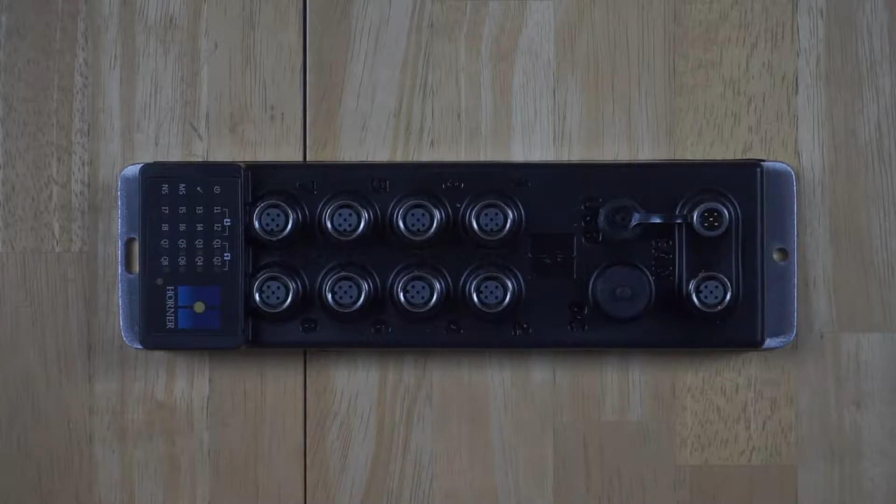So let's go ahead and take a look here. All right, so this is the new product I want to go ahead and demo for you today. What is it, you ask?

Well, it is a new Horner IP67 I/O block. How about that, huh? Really nice. Now this is something that we've never talked about before with our customers. We've had a few partners that we've mentioned it to, but this is really a brand new product. It's not ready to sell yet, but it's getting pretty darn close. And again, I'm going to preview it for you here for the first time anywhere.

So let's kind of walk through the product a little bit here. All right, so let's start up here. So as many of you may already know, a lot of our remote I/O products are based around CsCAN, which is our proprietary CAN network. And this product is no different. So what we have here is we have a CAN in and a CAN out port. So that's where we make the network connections.

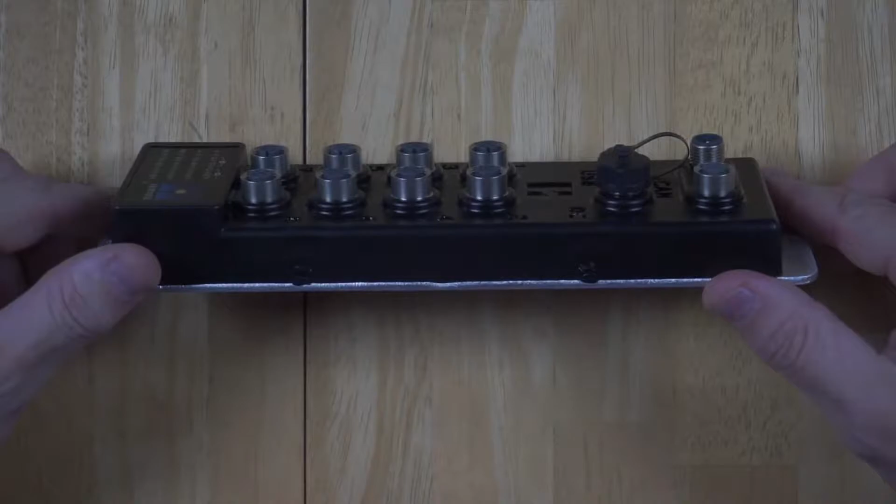Now, for those of you who aren't necessarily familiar with what IP67 I/O is, basically it's I/O that you can put out right into the environment of the factory. You don't have to put it inside of a panel because of the fact that it's molded and it can be directly washed down. It uses sealed connectors, and you can put it right out in the environment, not inside of a control panel.

And our products have been used in these applications for years, but with third-party I/O. And now we've got an I/O block ourselves that can be used. That'll be very cool. All right, so let's walk through it. I started to mention the fact that we have a CAN in and a CAN out port. So you can just use standard cabling and daisy chain them in and out. Okay, very cool. Also, power comes in from here as well. So just like Smart Block or Smart Rail or our other I/O options, they get power from the CAN connector, and that's true also with this I/O block as well.

All right, so here we have CAN in and CAN out. Now, if this guy is on the end of the network, you'll have a CAN in or a CAN out, but not both. And then there's a standard plug with a resistor embedded in it. That is a standard molded product that can be purchased to give you network termination, again, using the same connectors. So that's also very cool.

Okay, now I'm going to skip these two connectors for now, and I'm going to proceed to the next 8 here. So what we have here are 4 input connectors and 4 output connectors. And we've got 2 digital inputs on each of these connectors and 2 digital outputs on each of these. Well, using a standard cable, how are you going to access, let's say, 2 sensors on a single port if you've got the 2 inputs here? Well, just like a lot of companies that sell IP67 I/O, we've got these splitters that will be used to provide a connection for 2 sensors, for instance, with a single port.

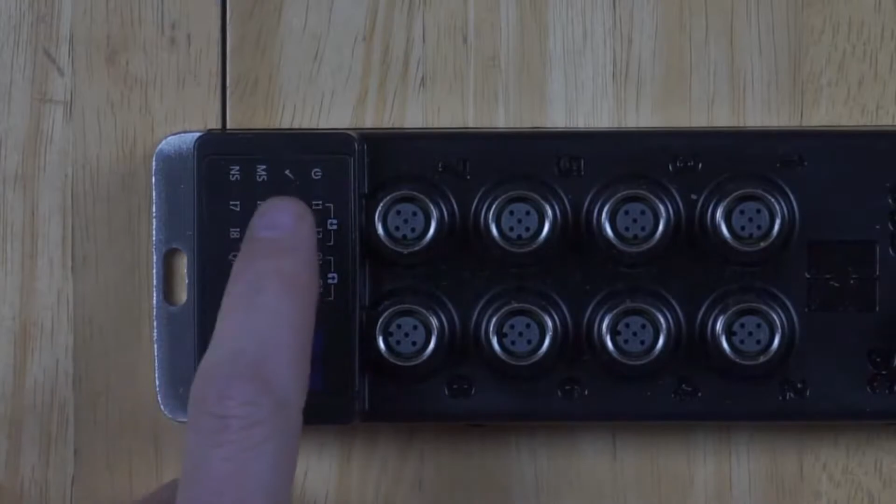Okay, now let's go ahead and take a look down here. Let me zoom in a little bit here. All right, center this back up. At the bottom here, we've got LED indication for the 8 inputs and the 8 outputs. Now, this is all sealed, okay, so it's wash down rated, no problems there. In addition to those LEDs, we've also got network status, power, and OK lights like we have on all of our remote I/O products. So that's very cool there as well. And I'll come back to this area of the product here in a little bit.

All right, now, and I'll go ahead and zoom back up here, but believe it or not, there's actually more here. I haven't covered all the features and functions yet. On these 2 input ports, not only can we support standard digital inputs, but we can also support high-speed counting. Very cool, okay? So that means that if you have encoders, or if you've got some sensors that are going to be responding in a very high-speed way, and you want to do totalizing on those sensors, photoeyes or something, you can do that. So these are compatible with encoders and high-speed counting in general. So not only do we have 8 digital in and 8 digital out, we've got high-speed counting. Pretty cool.

Okay, still, we've got more here. Now, in addition to the digital inputs and digital outputs and the high-speed counter capability, we've actually added analog signals to some of the spare pins as well. So with the appropriate cabling, you've got analog inputs and analog outputs, 4 to 20 milliamps, available on the I/O block. So not only can you do digital I/O and high-speed counting, you can do analog in and analog out, 4 to 20 milliamp, which is by far the most popular analog signal type. Okay? Awesome.

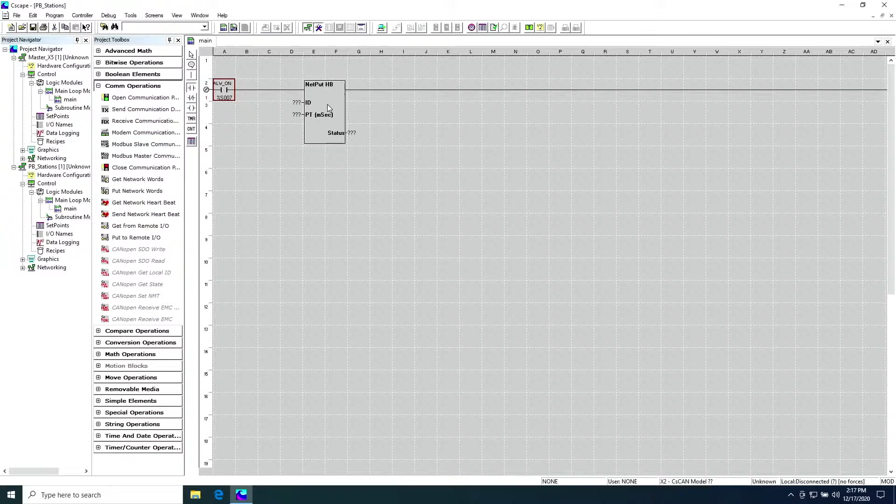So I'm just going to use an always on normally open contact here. Okay, what network ID would I use? Well, I just want to use whatever network ID has been assigned to this unit. And that information is available in system register 29. So regardless of how it's set ID-wise, if I use system register 29 as the network ID for this function block, it's going to show up properly, okay?

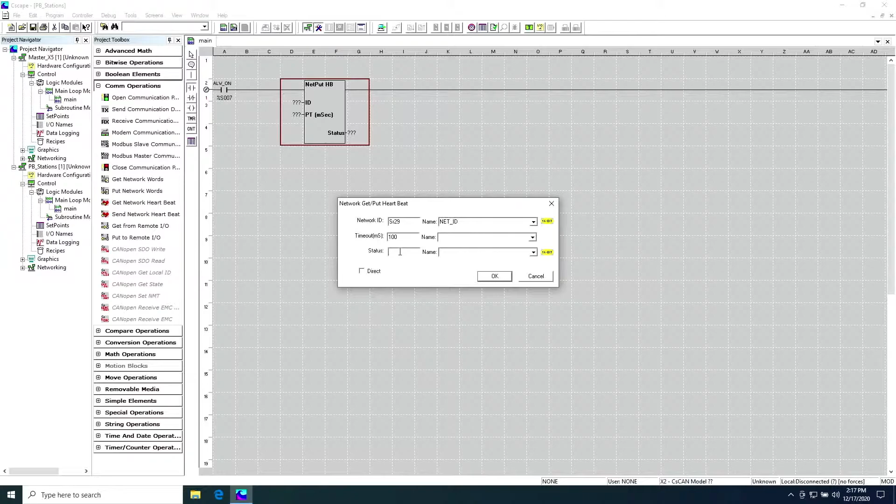And then I'm going to set a timeout. So let's say I'm going to send a heartbeat every 100 milliseconds, and then there's a status register here that we can assign. I'm not going to talk about that much right now. Okay, so now we're sending out a heartbeat every 100 milliseconds, and the main OCS on the other end can look for that and make sure that it's there to verify the health of this particular unit that I'm programming.

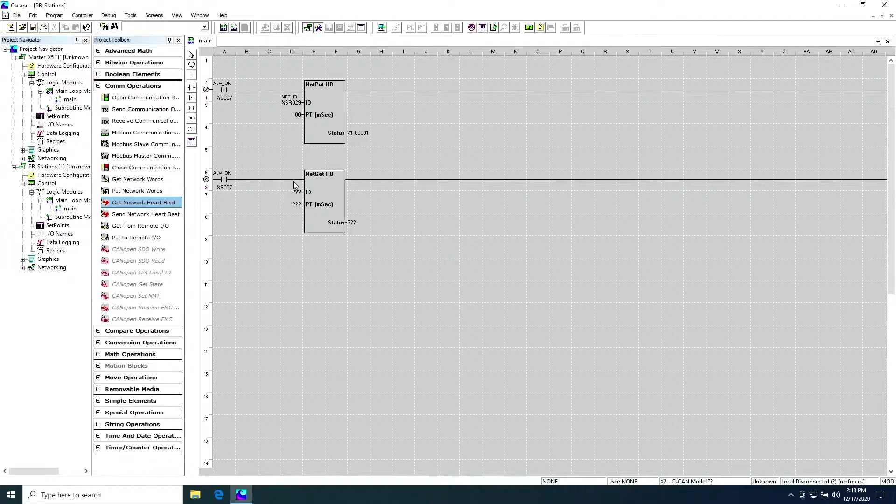Now I'll go ahead and make that another always on contact here. And now I'm going to add in the get network heartbeat, because not only does the main OCS need to know that this device here is healthy, we also need to know that that OCS is healthy so that we can react appropriately and maybe turn the outputs off, for instance. So this time under network ID, I'm not using my own network ID. I'm going to use whatever the OCS's network ID is.

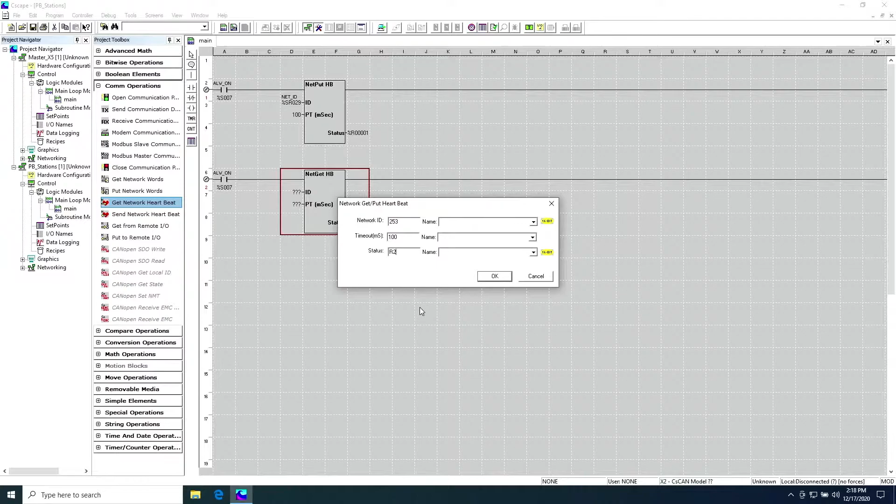Okay, so I'm just going to fix it at 253. We'll assume that's what it is. It could be something different, but I'll just make it 253. And then we're also going to configure how often we're expecting a heartbeat from this device. And similarly, we're going to assign a specific status register to that. All right, so now I'm exchanging heartbeats with the main OCS.

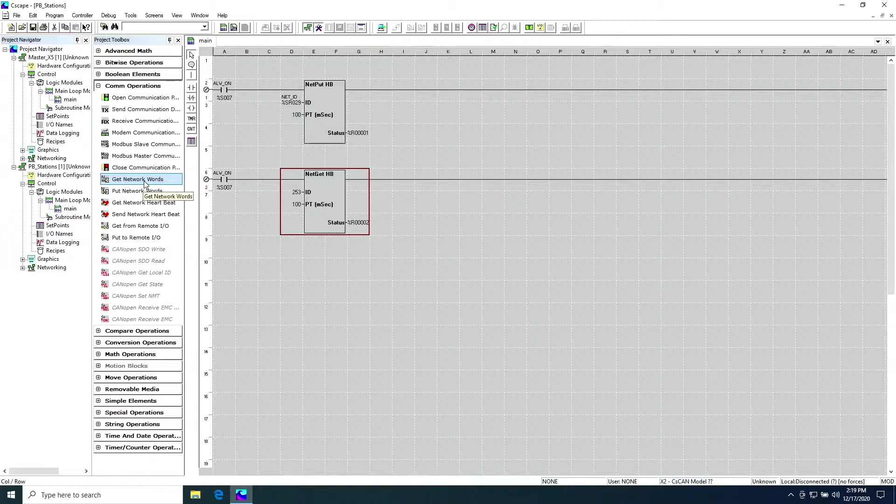The next thing I need to do is exchange data, right? I've got digital inputs, I've got analog inputs that I need to get to the main OCS, and conversely, I've got digital outputs and analog outputs that need to come from the main OCS. So the way we do that is by getting and putting network words of data. So in this case, let's start with the digital inputs that we're going to broadcast to the main OCS so he can see those, okay?

All right, so I went ahead and dropped this network put function block. Again, I'm sending data to the network, so I use my own network ID here. Okay, I'm going to send global data, and let's go ahead and start with digital.

All right, because I'm going to go ahead and send my digital inputs to the network, my %i's. I'll make those all sourced at %i1. And we typically send those one word at a time, so I'll make that one word here. And I do want these sent on a change of state, because every time I have a digital input change state, I want that to go immediately to the network. So I'm going to go ahead and check that checkbox.

Now I also have the option of sending extra transmissions, so I can either decide to do that or not. In this case, I'm just going to assign the always off contact to that because I don't need to send any extra transmissions. I'll just do it on a change of state basis. And since I'm sending data to the network only on a change of state basis, I can go ahead and make this an always on contact as well. If it wasn't change of state in that function block, I wouldn't want to do that because I could be flooding the network. But in this case, I'm not going to be flooding the network, so I can go ahead and do an always on.

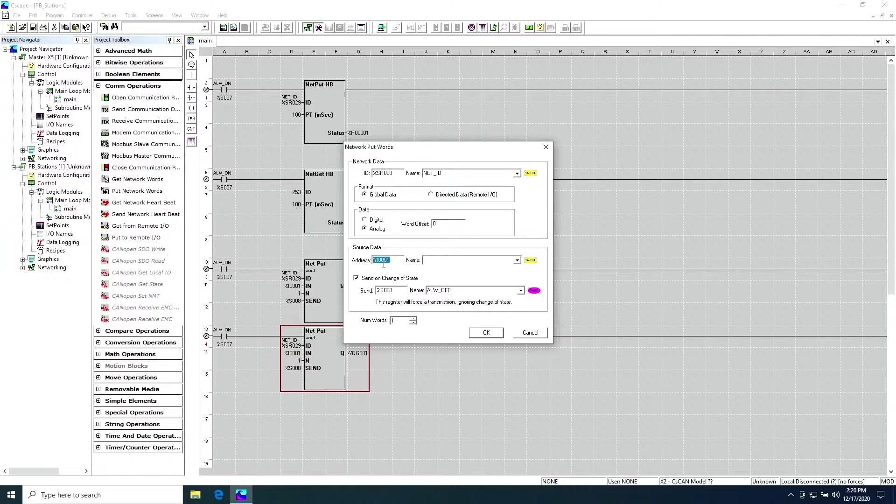All right, now similarly, let's just go ahead and copy this function block here and paste it and just tweak it a little bit so that instead of sending our digital input data, we're sending our analog input data. So I'm going to switch this to analog type. Okay, again, going out as global data. And instead of coming from digital I1, let's assign AI1, and let's go ahead and assign 4, AI1 through AI4, 4 words there. Okay, so we're done there.

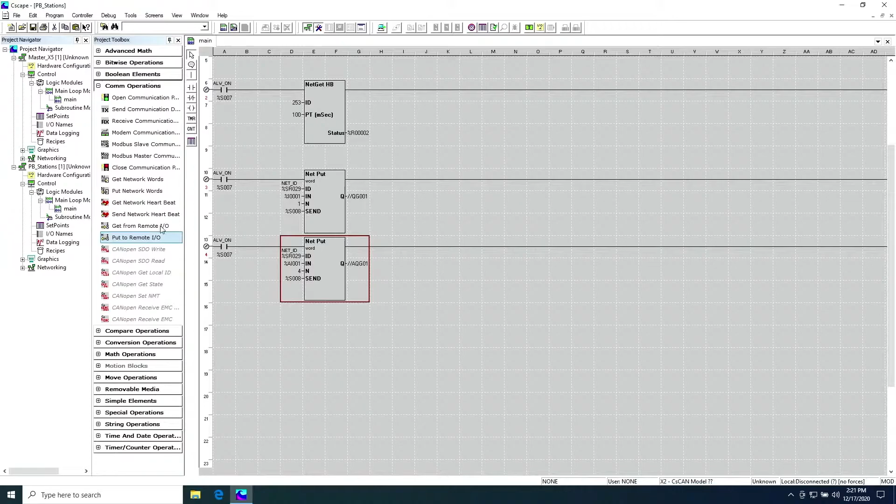All right, so now we have exchanged heartbeats. We've also transmitted our digital inputs and our analog inputs. Now we would add another function block here to send high-speed counter data, but for now I'm just going to skip that. We're just illustrating how we would do this. All right, now let's get data back from the main OCS, and to do that we're going to do a net get. All right, so get network words. All right, we've got that there.

And now with network gets, we're effectively getting data from the network. So we're not creating network traffic when we use this function block. Therefore, it's always okay to use an always on function block with a net get because we're not creating network traffic. We're just copying data that's already there from the network into our local memory. Okay? So this is a network get function block. It's coming from the main OCS. We said in this case that was from ID number 253. We're going to start with digital data.

Now, the main OCS has up to 64 bits of this type that it can send out one word at a time, that we can effectively map into our local memory. So in this case, I'm going to leave this offset at 0 because I'm going to copy the first 16 bits from the OCS that it's broadcasting into my local %Q address space. So %Q1 here is coming in from node 253, and it's the first 16 bits of the digital data that's being broadcast by the main OCS.

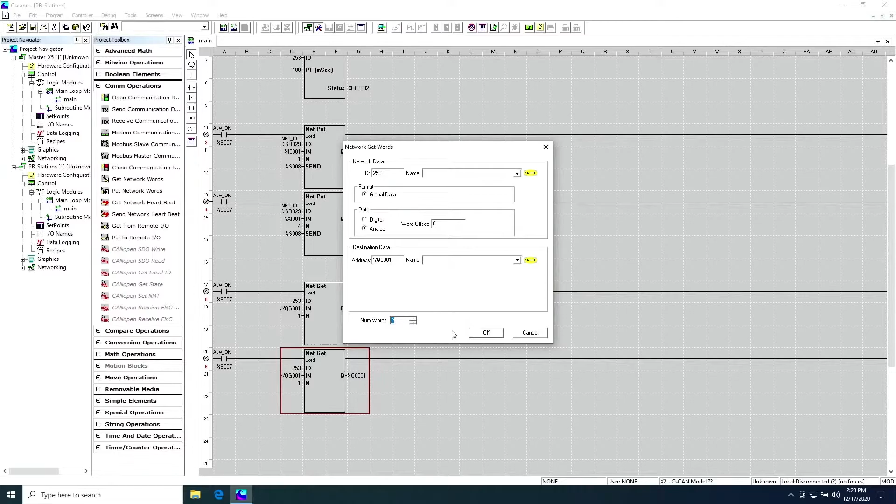And if we have a lot more than 64 outputs that need to be assigned, that's not a problem. There's other ways we can solve that. But again, for this simple example, I'm just showing you how we would do it here. Okay. And then lastly, just like we did on the input side, let's copy this block here and paste it. All right, and then let's assign our analog outputs here. So we're going to get this from analog data. We'll leave the offset at 0. In this case, let's make it 2 words, not 3, because we've only got 2 analog outputs that we're actually sending out.

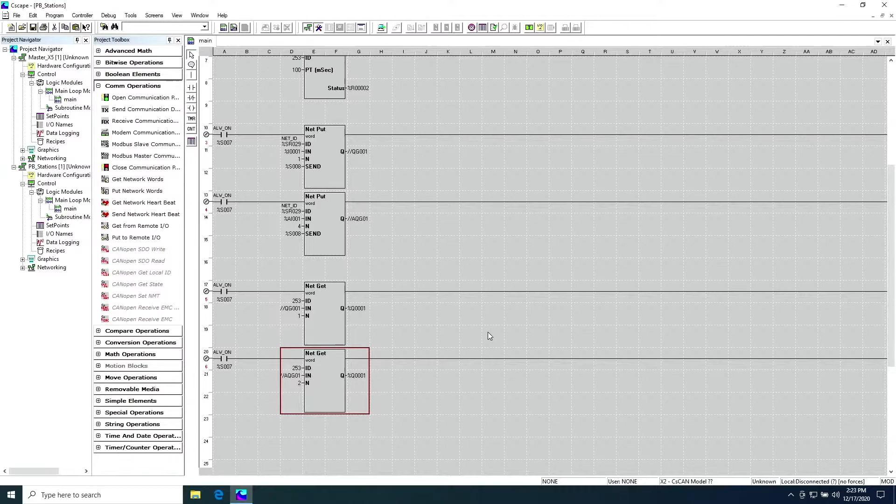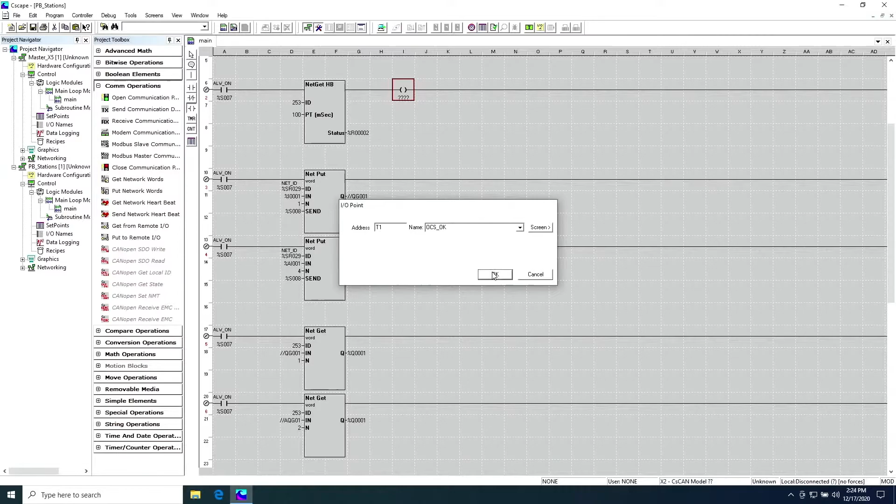Okay, so this, in a very simplistic way, shows you how you can very quickly and easily move I/O data and create a simple program in any OCS device that you want to use as remote I/O. Now, there's some subtleties here that we're going to want to address. For instance, I'll want to add a little bit of logic here. On my get heartbeat, I'm going to want to add a coil here so that I always know that the main OCS is healthy. So I'm going to just call this T1, and I'll give it a name of OCS OK. So what that means is if I'm successfully getting the heartbeat from the main OCS, this bit is on.

So I also really should add another rung here that says if the OCS is not okay, then let's go ahead and write all zeros to our analog outputs and our digital outputs so that we're in a safe state when that occurs.

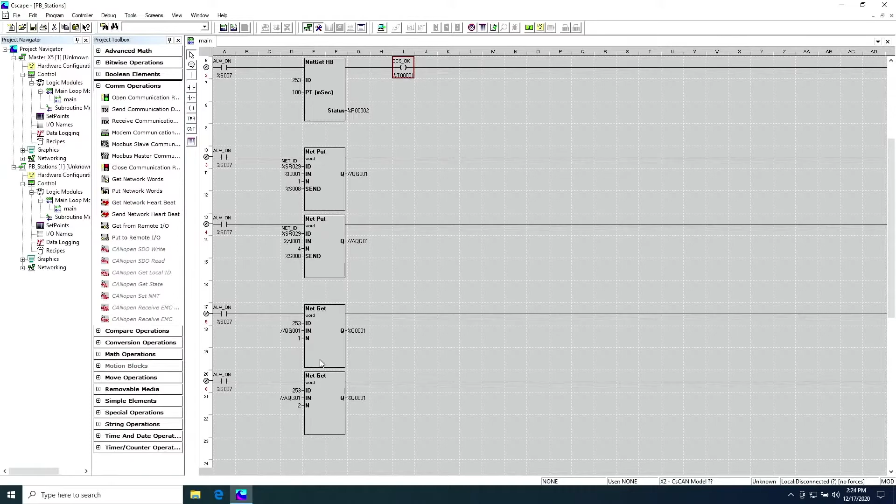Okay, so that hopefully will give you a good flavor about how really you can take any OCS product and write a very simple program to turn it into a remote I/O block, and that might be a really cost-effective thing to do for your application. It really might be.